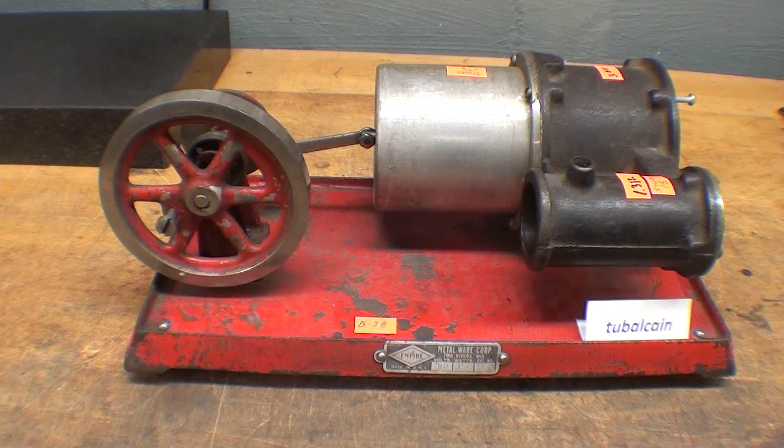Today I'm starting a new project a little bit different than what I usually do. I'm going to try to restore, or I should say rebuild, or bring to working condition this beautiful Empire hot air or Stirling engine.

You saw this in a recent video where I unboxed it. Remember, that was the box that the post office played kickball with all the way from San Diego to my house. This was sent to me as a gift, and I'm very thankful to Bob Kern, who is a collector of Empire engines, and sent this to me. He had several of these. This was a parts engine.

He has one or more that are in running condition and can be seen on YouTube, or perhaps they're not his, but you're going to see several of these in operating condition running.

Now, I have done at least a dozen videos over the years on hot air engines, so take a look at those if that interests you, but they were not viewed by very many people, so I don't think there's a lot of interest in hot air engines.

I'm not going to explain how this actually works. I'm going to work on it and try to get it running and explain things as I go along. It'll probably be a multi-part video.

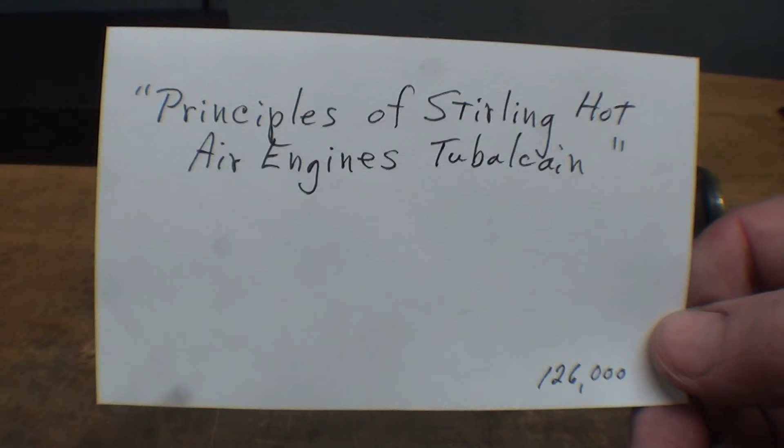But if you actually want to see how they run, look up this video of mine, do a search on YouTube, and there were a lot of people that watched this, about 126,000, so I think I explained it in very thorough terms. Look at that if you're in the mood.

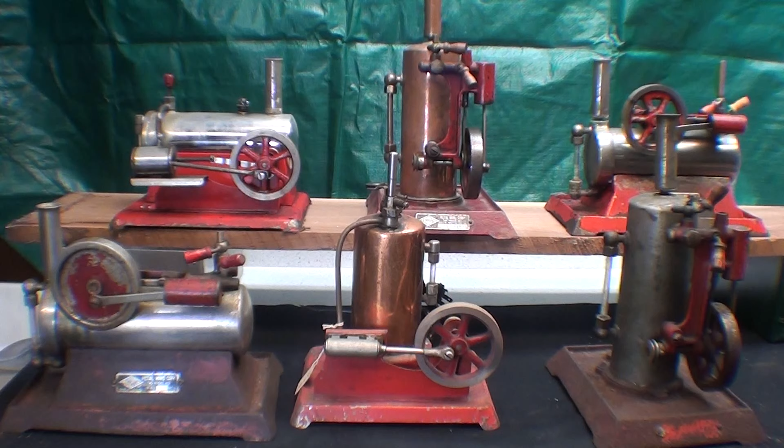Let me talk a little bit about Empire engines. Here it is. This is my rather modest collection of Empire steam engines, and they were made by the Empire Metalware Corporation, Two Rivers, Wisconsin, probably in the 20s, 30s, 40s, maybe even into the 50s for quite a length of time, and they were all electric.

As you can see, in addition to these, there were several other models that I'm aware of. There also was a turbine model, which I have seen and never owned, and they made the one Stirling engine that I just showed you.

These were patented by various people, and the patents assigned to the Metalware Company, and I'm going to talk about the patents in just a minute. I don't know so much about patents of this type, but patents on the Stirling engines, and they were all very sturdily built and quite heavy, cast iron and brass and copper and all the real good metals, no plastic on these at all. Some insulated parts out of wood, but just quality construction.

However, this must have been one of the later models, this one too, where they cheapened them up and made a so-called tin base rather than the cast bases. That's all I'm going to say about the steam engines, because I'm not sure there's any interest in that, but I do have some other videos showing those.

Now let's get back to that Stirling engine. Apparently very few of these were made, and the reason would be they probably were a little bit too expensive, and the other thing is there'd be little interest, because once you got them fired up and running, there wasn't any tending to do like there was on a steam engine, so you would just sit there and look at it, and it would in fact be no more interesting than looking at an electric motor running. So you know that's not going to keep the interest of boys very long.

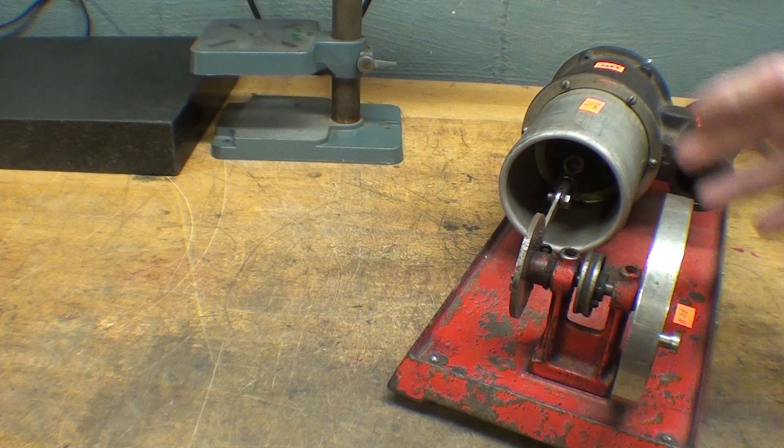But these could also power, so you see there's a pulley here, in a store display, I'm told, by belts and shafts and everything. They could run the steam engines powered by this, strictly for display purposes and probably safe from fire. And here again is the tag from Two Rivers, Wisconsin. 350 watts, and it's a model B38.

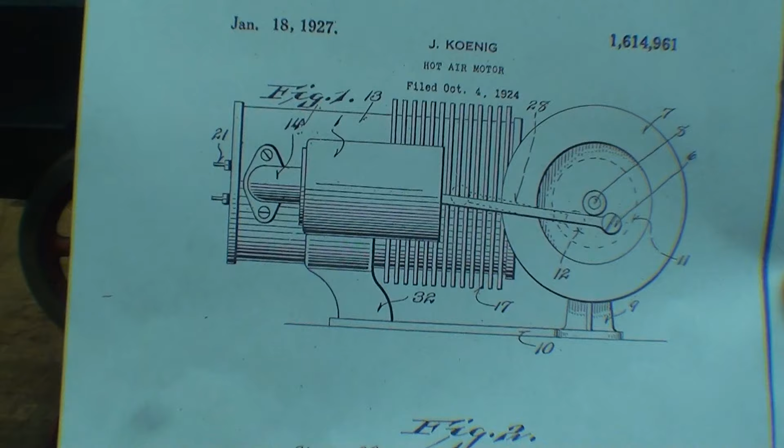I understand that there were several models of these. Some had cooling fins on them. This one, at first I thought the fins had been removed, because you see in the patent drawing here there's fins, and quite often there's cooling fins on hot air engines, but none on here, so apparently it will run without them, at least for short periods of time.

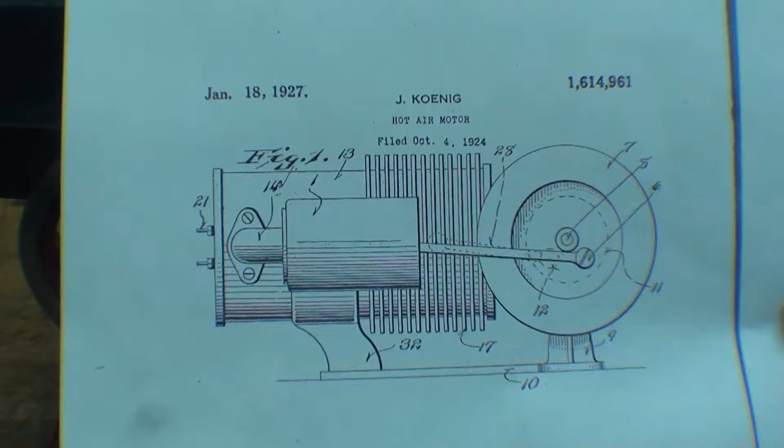If such a thing would interest you, there's the patent number. You can look that up, and there's about 3 or 4 pages of text explaining the patent. It goes back to 1927, and it was patented by J. Koenig, I believe, but the patent was assigned to the Empire Company.

And there's another view of it, and this is going to be most important to me because I had no idea what was missing or how it functioned. Well, I know the principles of it, but this is quite a bit different in its construction than the other ones that I use. So this is going to be my resource.

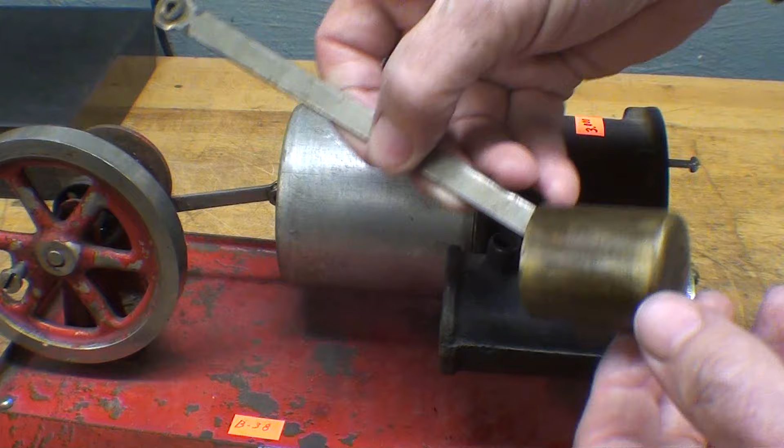As you know, there's a displacer piston in here. Actually it's called a displacer, but in the patents they sometimes call it a piston, though that's incorrect, at least now. Here's the power piston that goes in the cast iron cylinder right here. This is bent and needs to be repaired. You can see there's a bend in it, but it's very heavily constructed and nicely made, and it goes onto the flywheel right here.

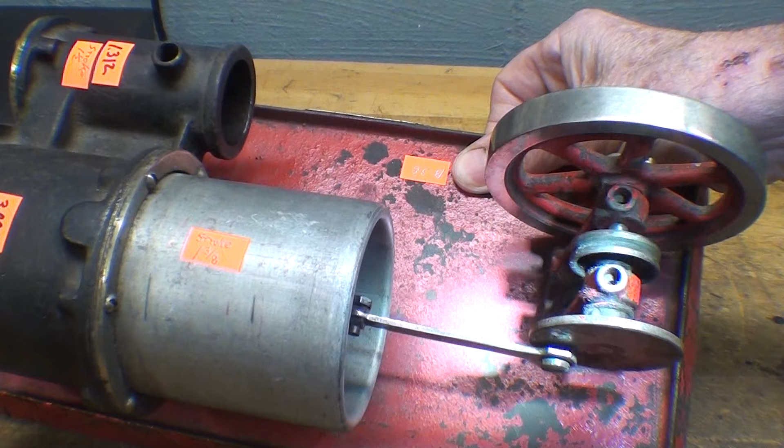On this side you can see that we have two bearings right here with oilers and a quarter inch shaft, and remember that this pivot point here is 90 degrees out of phase with the one over here on the flywheel.

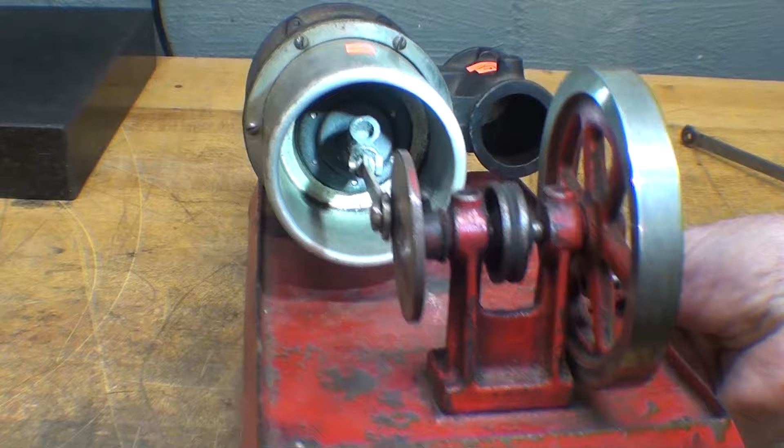Looking inside here, I don't know if that shows up or not, there's an oiler right there also, so this is really neat the way it's constructed. Now this is a double wall here and hollow, that's aluminum. All of the rest over here is cast iron.

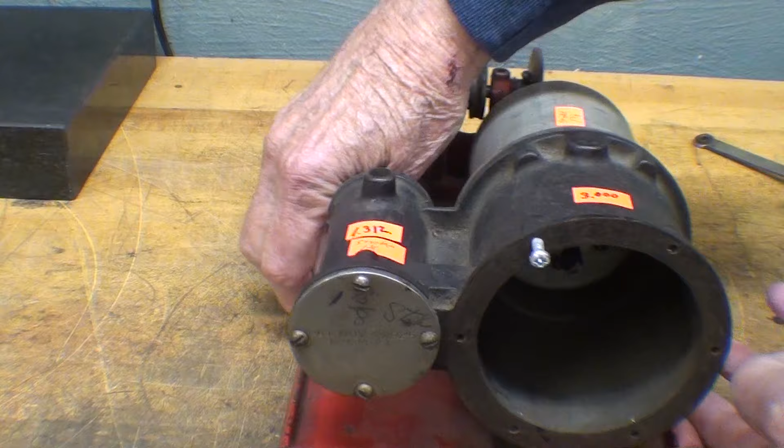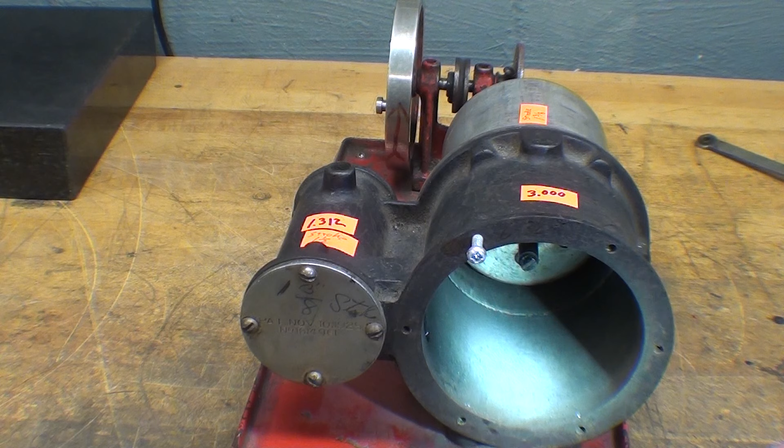So what is missing, you say? Well, first of all, there's a cover here that had the heating element on it, and that's probably why it was taken apart. That either failed or, generally what happens with any little toy like this, a boy took them apart, and that might be 50 years ago. And of course they didn't put them back together because once they got it apart they had no idea how to repair it or knew how to get parts or had any money, so Mom threw away the parts, and this somehow managed to get saved.

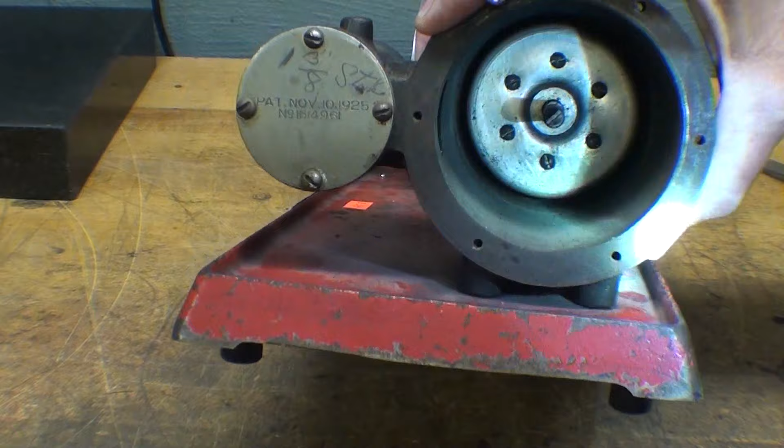But if you look in here, this piston rod is either broken off or cut off or something, so I have to deal with that. So I just talked about the double wall here. Looking in here now, you can see what's left of it, or what it looks like from the inside.

And someone wrote on here a long time ago, 1 3/8 stroke, and that refers to the stroke right here, which is 1 3/8. And this is 3-inch diameter, exactly 3-inch diameter. The power piston is 1.312 diameter.

I put all those orange tags on there. They look like price tags, well, they are price tags, I'm using them as information tags. And this has a 1 1/2 inch stroke on this side. So the piston, the brass piston, moves 1 1/2 inches back and forth. And again, 1 5/16 diameter, all one piece, pressed.

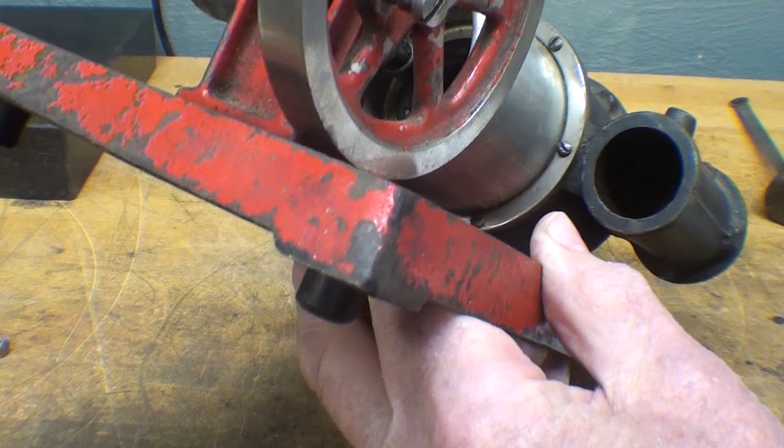Wow, that's nice. I don't know what this is. I thought it was an oiler, but there was nothing on the inside. And that's just the head, just a stamped piece of steel. A lot of stampings because that's the kind of company that they were.

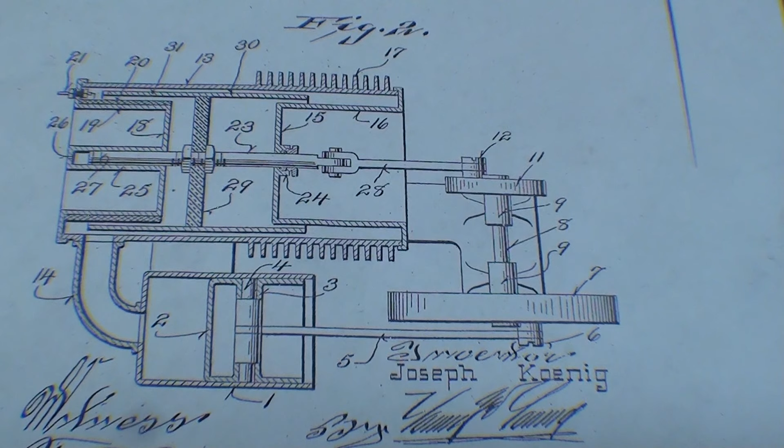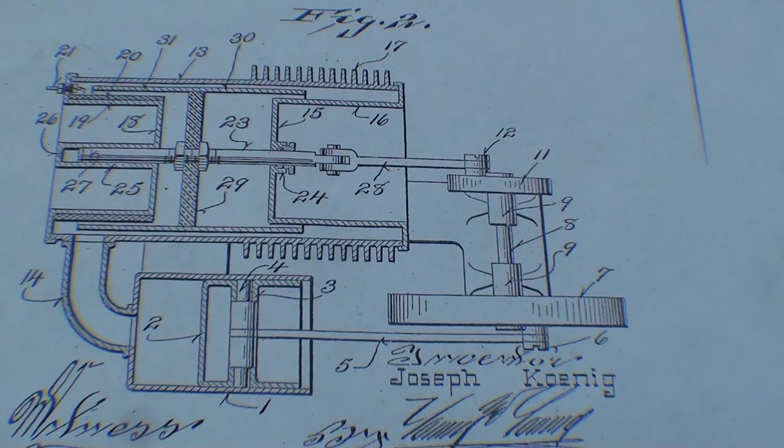I think these old drawings are just so awesome. It would all have been pen and ink on the patent drawings, done to certain specifications, and look at the lawyers' names on that, all done with ink pen. Really neat. Now you will notice that this is almost a reverse image of the actual engine that is sitting over here, and a patent drawing didn't always totally resemble the final product. There was a concept there that they were patenting.

Notice that they call this a conduit. I would have called it a pipe, but the conduit connects the power piston, power cylinder, with the displacer. But here's what is missing. You saw that there was some piston rod that I said might have been cut off, so it apparently was cut off right about here.

But this displacer, which looks almost like an H, is missing, as is the other end of the rod, right in there. And this piece, whatever it is called, is missing, and it had the heater element in it. But notice that the displacer rod extends into this piece for support.

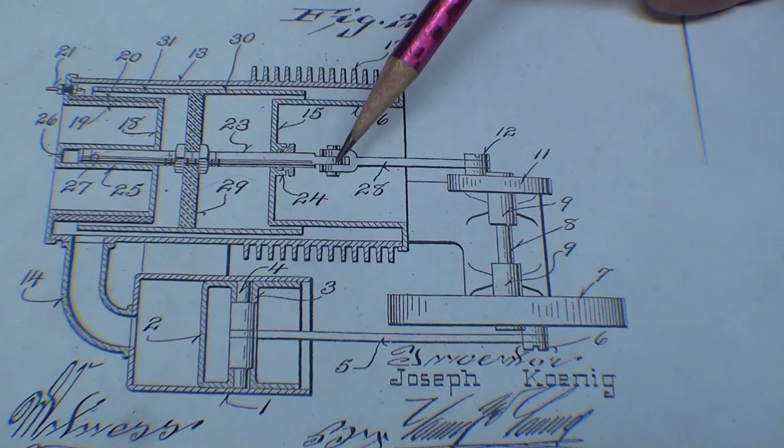The whole idea of the displacer is to move the hot air from the hot end down to the cold end. This is a so-called cold end, and there's contraction going when it goes in one direction and expansion in the other direction, and that pressure, or lack of it, is translated through the conduit to this.

I said I wasn't going to try to explain that. Go to the other one. That's all I'll say about that. But I thought it's really neat.

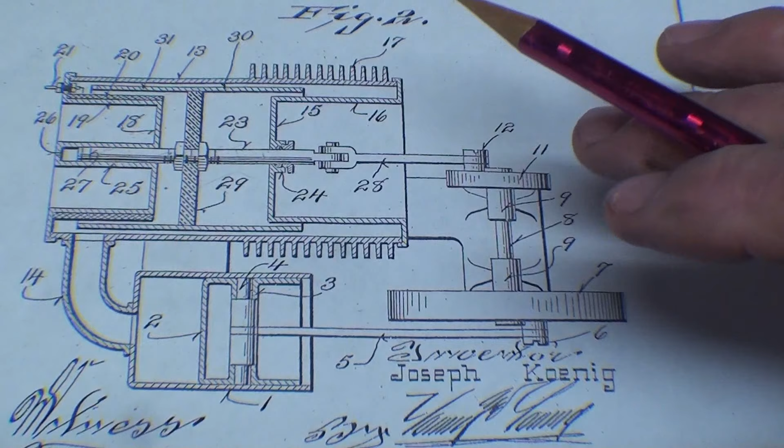Also, there's a tiny little hole here at 26 so that this doesn't act like a piston, or I should say like a little compressor, and cause friction, because you can't have any kind of friction in an engine like this. Very little power is produced, and if there's rubbing or anything like that going on, it just isn't going to work.

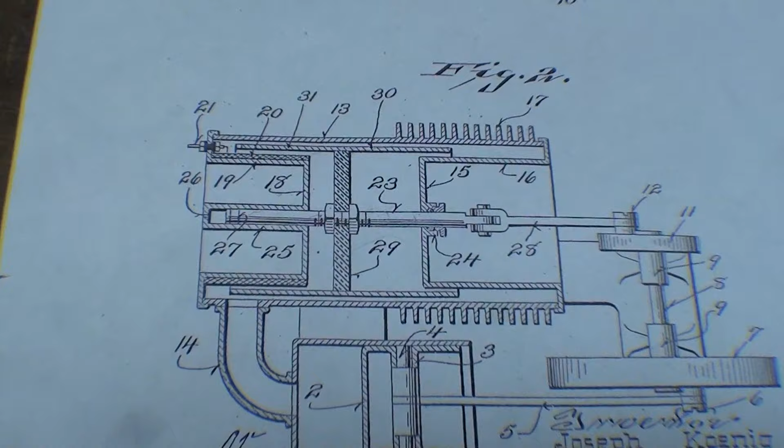And how am I going to get this thing running? Well, there's nothing wrong over on this side other than that bent connecting rod, so I don't need to worry about that at all. That'll be real simple. But what is missing and needs to be built on this side - again, I need a new shaft, I need a new displacer, and then this whole end piece.

And I'm just thinking about this. I spent a lot of time thinking about this. I already have for several weeks. I'm not even thinking at this time about the heater.

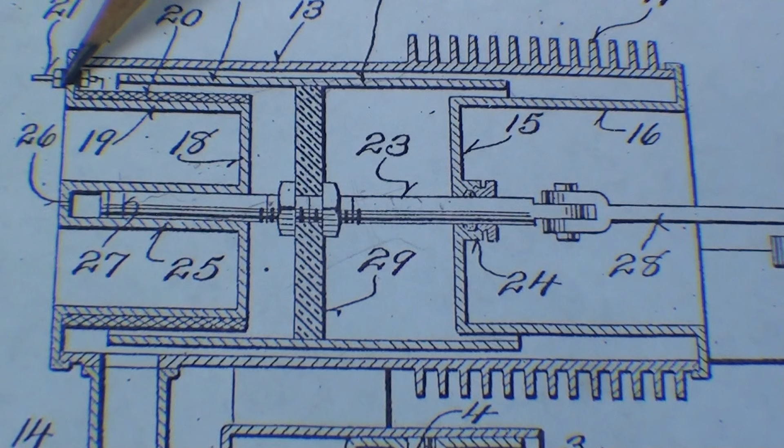This shows very little of the heater, and it would have been, of course, a resistance unit. I hope to get it running on an alcohol flame, and that will satisfy me that I do not need to necessarily have a plug-in.

But surprisingly enough, I know I'm gabbing a lot here, but if you're still listening, you're probably interested in it.

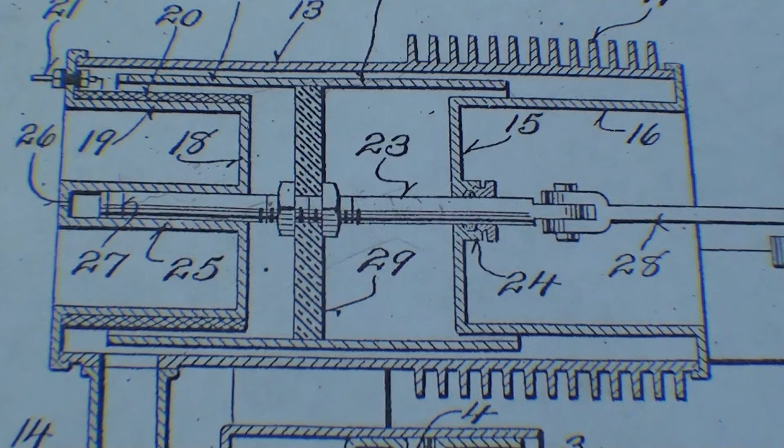Several things were mentioned about safety in this 1927 patent. Safety for the children, safety from being burned or electrocuted, so that was mentioned. Also, repeatedly they mentioned that they wanted the toy to be sturdy and not fail and require little maintenance or attention, so that was in the patent.

I could start with solid bar stock aluminum because it needs to be as light as possible, and I don't even have any aluminum that large. I'd have to wait till the weather gets warmer and make a casting, but there's just so much work to that and so much machining.

I'm really hesitant to do all that, then get halfway through and not have the thing work, and that would be extremely discouraging, and I know I'd quit. And if I quit, of course, you wouldn't be seeing this video at all.

But I just went to Walmart because I'm looking for some kind of container or cup or something that I could use in here that would be 3 inches. Well, it's got to be a little less than 3 inches, and it's got to have a thin wall.

Well, of all things, a Progresso, I think that's Progresso brand soup can, is just a little bit under. So I'm wondering if I can do anything with that.

Now watch this. This will go all the way in, so it's gone even in this double wall deal. Now how do I get that out? I gotta have a magnet here or something.

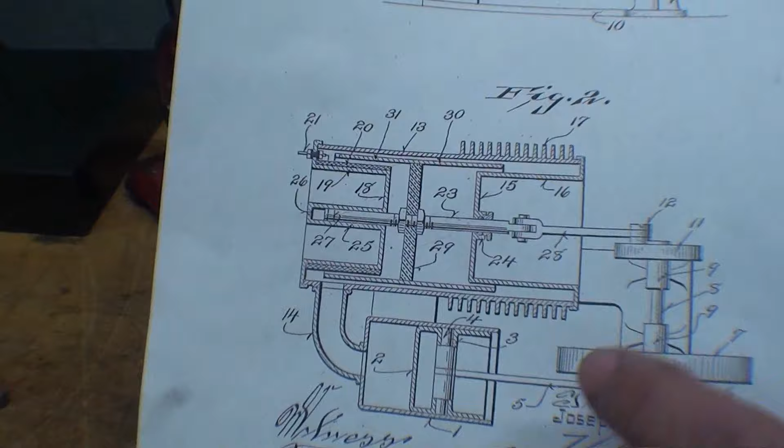Where's my magnet? Okay, but if somehow this could be modified - and I wish it didn't have these corrugations in it. So here's another brand. I don't know what that is, but that would be neat because in the middle here it is solid for just a portion. If only I could cut it off, you know, here, and then have that solid portion, which you see right here, in the middle, and that could be a piece of aluminum.

I don't want to make it steel. Steel would be nice because then I could solder it in.

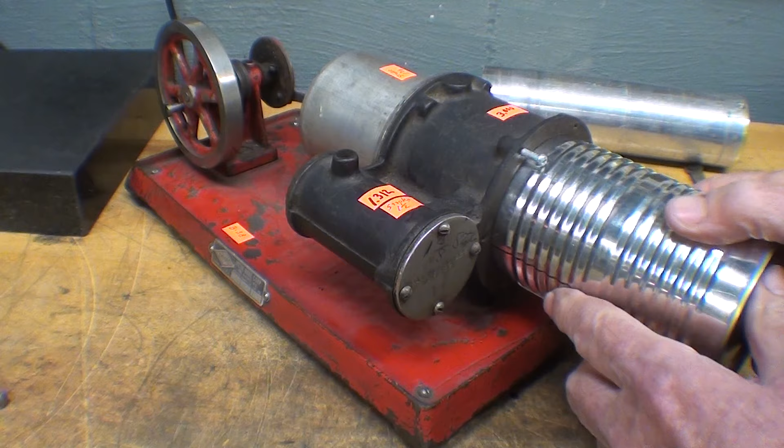So that's where I am right now. Now this one's a little too large here because of this lip here, but that can be cut off. But this one is larger than this. It's not going to fit.

And I could find nothing at Walmart, and those things that I did find were tapered or made out of plastic. Well, I need metal. I could start with a piece of sheet metal and roll it, but then I'm going to have a lap seam on there, and it's not going to run true.

So I really like to machine things, but I would like to start with something like this and make a mock-up and see if I could get it running and see if my concept or my idea of rebuilding this is valid.

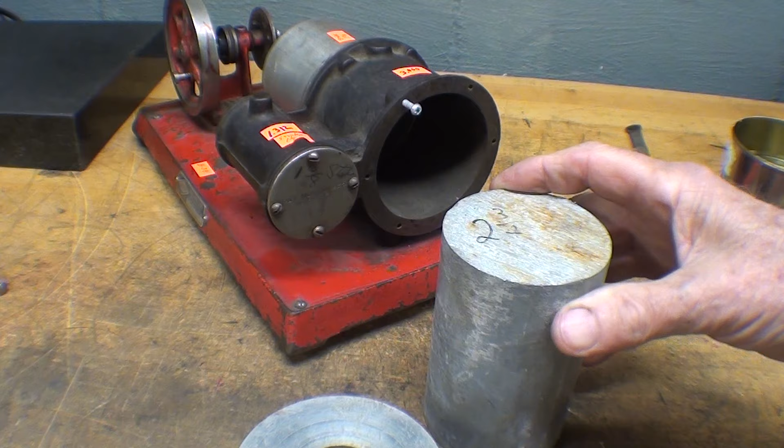In my experience over the years in repairing things and building things, I was always trying to use what I could find in the shop or in a junkyard or whatever. And I was almost always unsuccessful and wasted so much time, and I'm wasting time right now because looking through my shop, there's a piece of large aluminum, but it wouldn't be long enough, plus it's got that hole in the middle. Well, that might have helped me, but you know, there's a piece of solid, but it's 2 3/4.

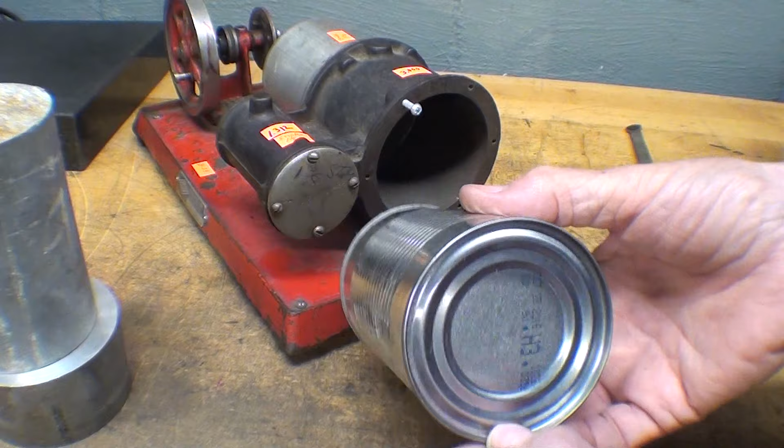I marked that years ago, so that's not going to work. So what I think I'll do, without further ado, is make a mock-up using this can, cutting it off so I can determine the lengths and diameters I need - a model so I can think about what all is entailed.

I think this outer cup that is screwed to this can be cast aluminum, but I'd have to make a pattern for that. And you can see I'm already testing to see what size the screws are - that's a 6-32 screw, common and easy to find threads, which is a relief for me.

You'll notice all the dimensions - the 3 inches, the 1 5/16, and the length of the strokes - are all common fractional sizes, easy for me, or for those of us who love the imperial system, to deal with without the nightmare of... well, you know what I mean.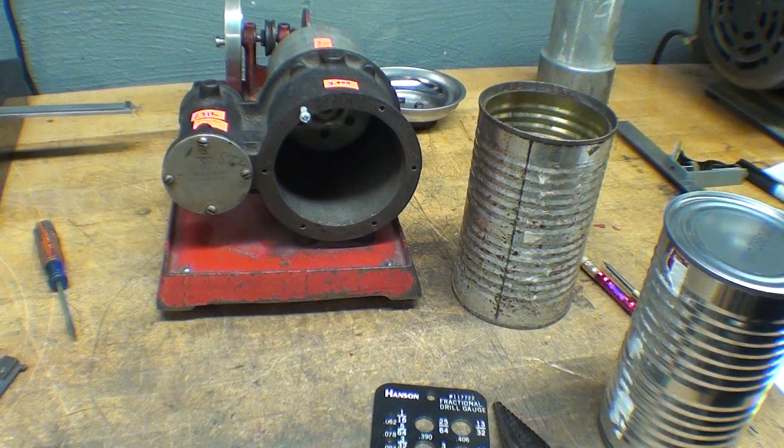This is the perfect can for my experiment - it's a seamless, so-called 2-piece can, all one piece drawn on the bottom. I've got some older cans around with a seam and a separate bottom, but that's not what I want. The other cans I have don't fit, they're a different size. So luckily my wife just went shopping, so up to the kitchen we go.

Alright, here we are at the cupboard. Let's see what she's got.

You see there's all kinds of soup cans, some bigger. When I worked at Del Monte years ago, in my prime, the cans had numbers like 303, but I don't know if they still do that. These Campbell's cans are too big, so are the Progresso, way too big. And the little old Campbell's - nobody buys that anymore, it used to be 9 cents a can. I live in the past.

Alright, Hunt's chili - that's the right diameter, pretty much the same can. Alright, she'll never miss it.

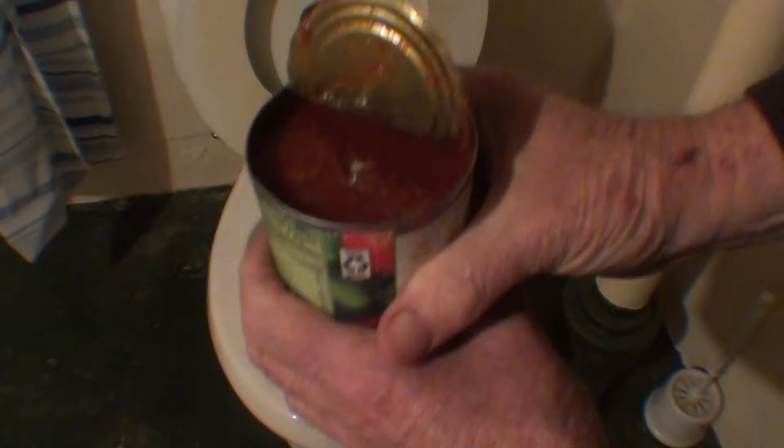Well, here we go, and I guess we won't be having chili tonight. I had a heck of a time with that can opener, and it's still not opened properly, but I've got to get rid of this and hide the evidence. And holy mackerel, looks like somebody had a real bad case of hemorrhoids.

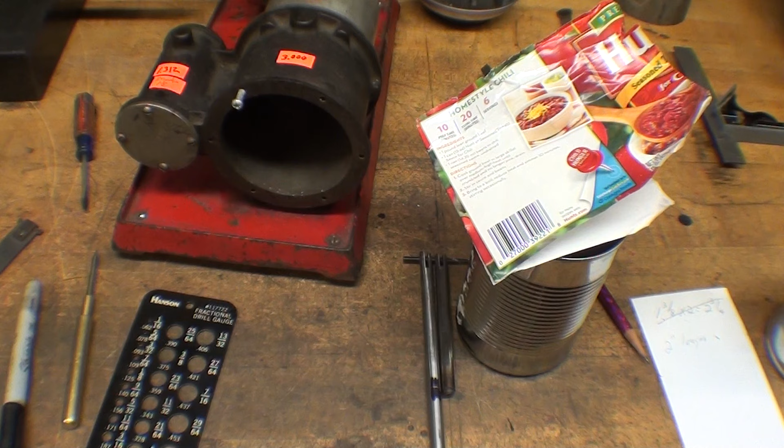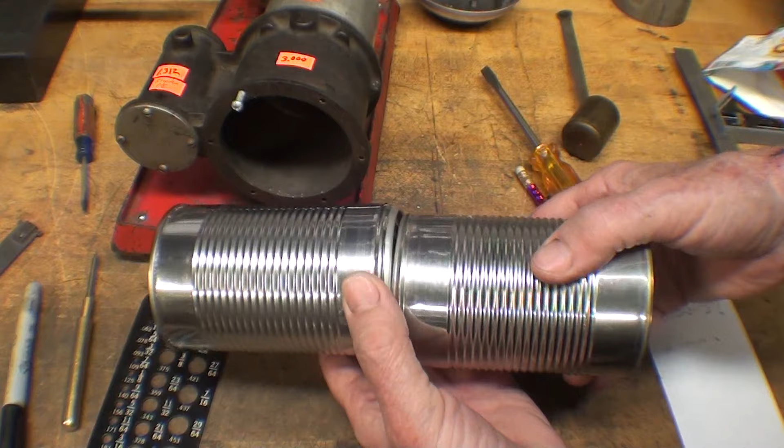I'm back at the bench, and I'm going to save the label so I remember to buy more of those if I need more cans, since this is just an experiment. I don't know how long to cut them, so I'm sure I'll need more. The whole idea now is to take 2 identical cans and put them back to back like that, then cut them to length, which is no easy job with this thin metal.

And then the rods - that's the piston rod now - is going to run in here. It'll be more or less like that.

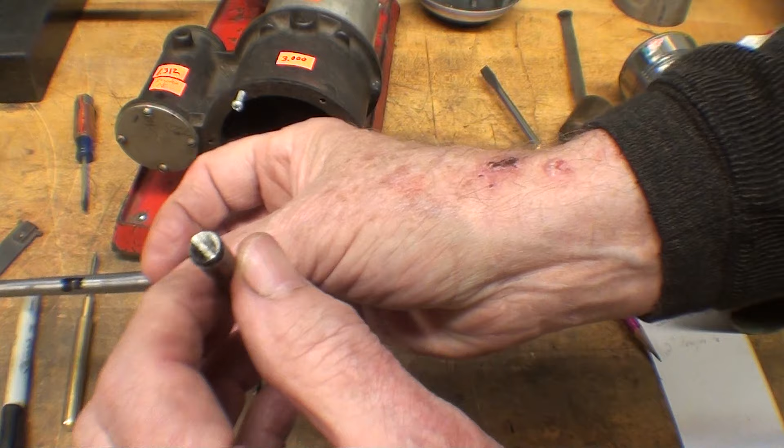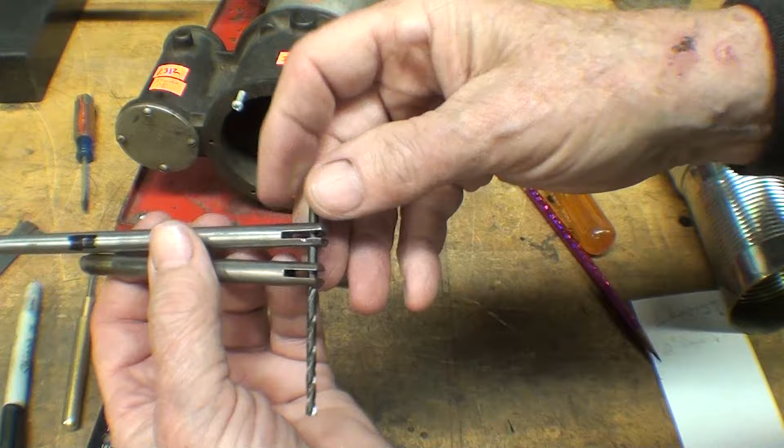I'm already making a new one here. This is the original, and I told you it was cut off. Well, it's like a combination of being cut off and broken, and that might be like 50 years ago. But I've already made one, and this was a little more work than I thought, considering this is just a sample.

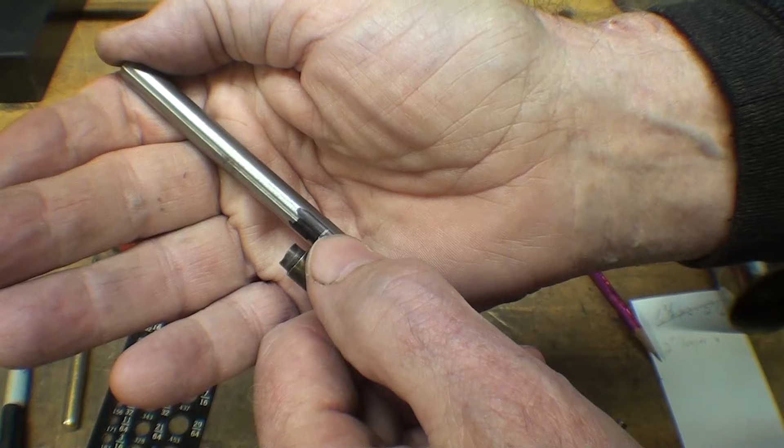I know I won't have all the dimensions right, but I got it slotted, and I got the cross hole drilled with this, which is 1/8 inch, and then I was able to mark it, as you can see there, and I need to turn down everything from my thumbnail to the end to 5/16 diameter.

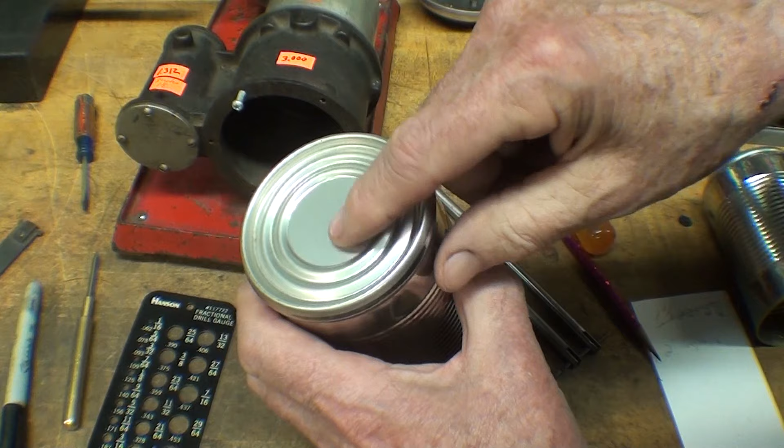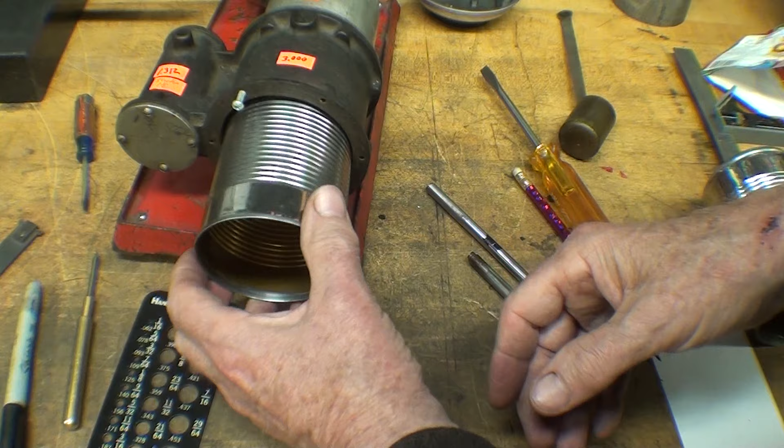So let me get started on that, but before I do - don't let me get ahead of myself here. I'm going to drill the holes in the bottom of the cans, and I'll show you how I do that so I get them perfectly centered. If they're not concentric, this is going to rub, and I need it to not touch, and it's so close to the 3-inch diameter that might be impossible to do.

Well, this concludes part 1 of a 3-part video on the rebuilding of this Stirling engine. It's just a long rebuild, and it's going to take more than one video, so I hope you stick with me as I go on to parts 2 and 3 and hopefully get this thing running. It's been a tougher job than I thought, and I'm glad I have a complete shop. I hope you're enjoying this, so I'll see you in part 2.